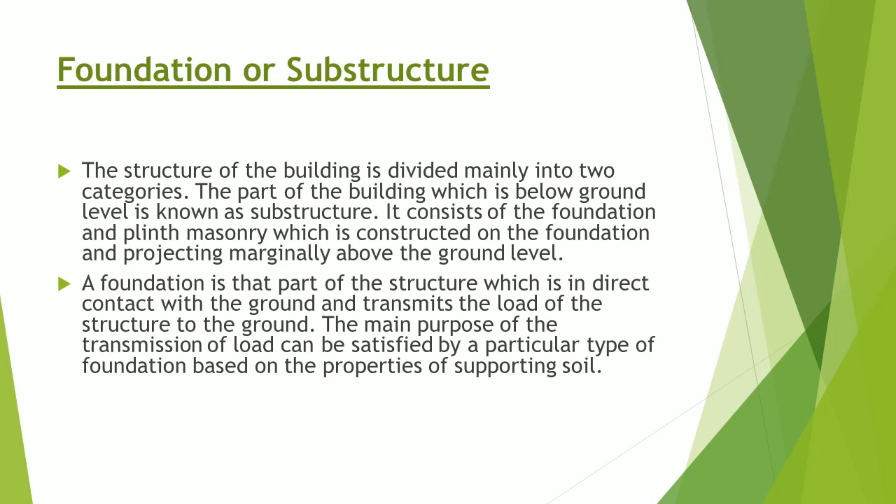The main purpose of the transmission of load can be satisfied by a particular type of foundation based on the properties of supporting soil. Functions of foundation: to transmit and distribute load of superstructure over larger area. To distribute the load on underlying soil evenly and thus to prevent differential settlement. To provide a leveled and hard surface for supporting the superstructure. To increase the stability of the structure as a whole against sliding, overturning, and other disturbing forces like wind, rain, etc. To prevent lateral escape of supporting material.

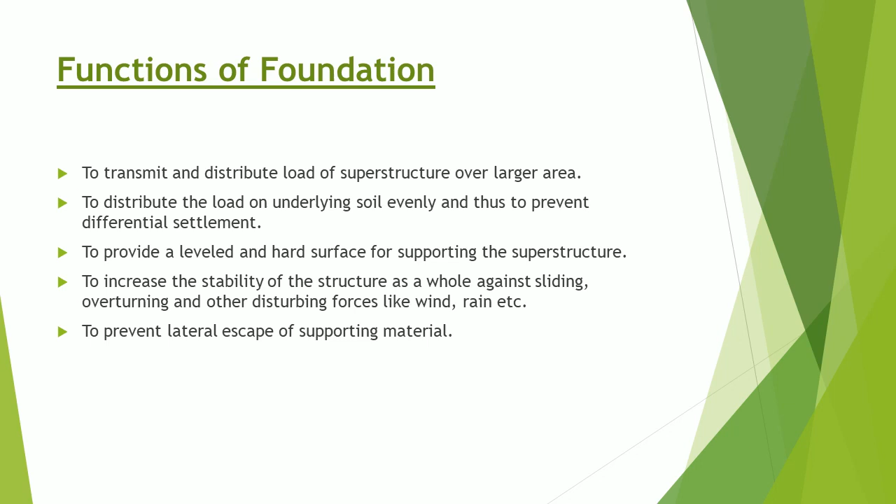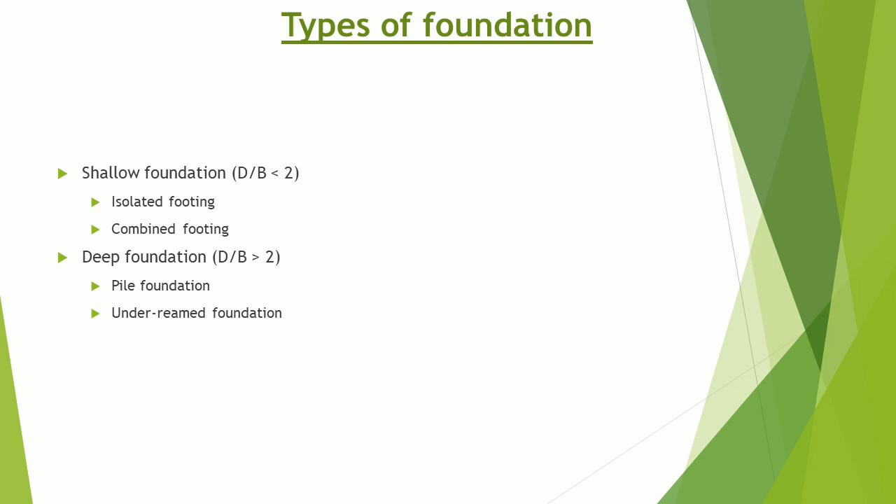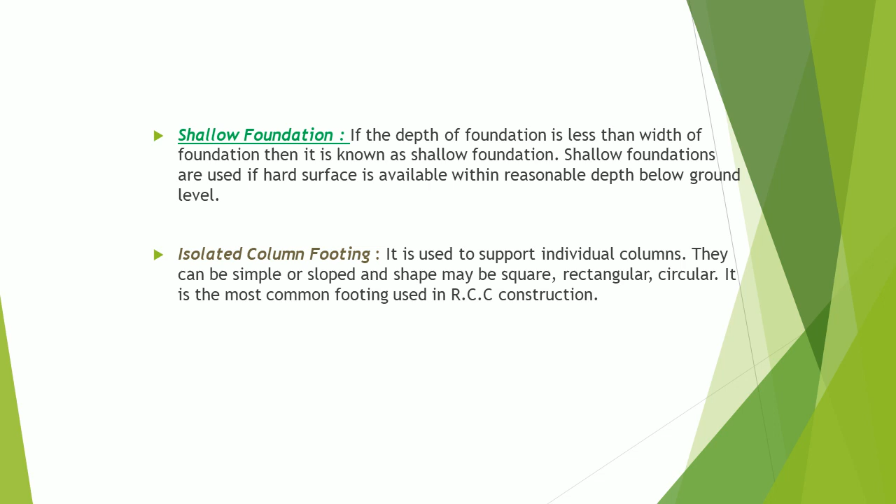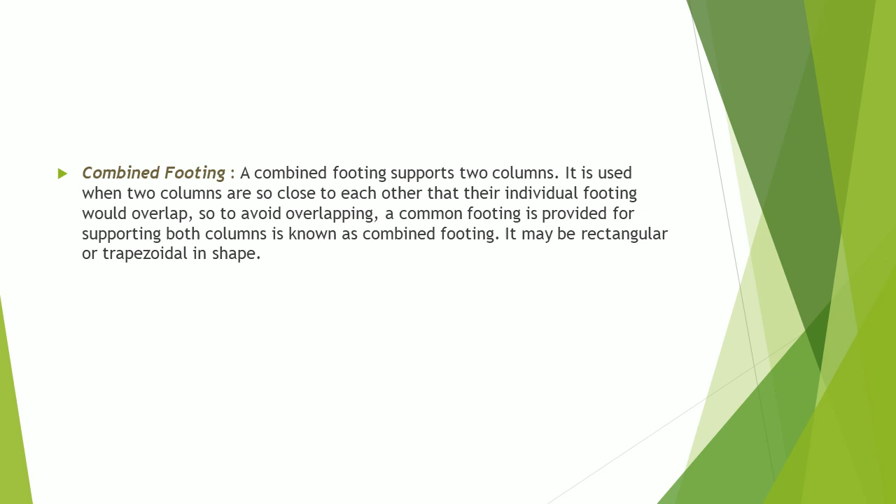Isolated column footing: it is used to support individual columns. They can be simple or sloped and shape may be square, rectangular, circular. It is the most common footing used in R.C.C. construction. Combined footing: a combined footing supports two columns. It is used when two columns are so close to each other that their individual footing would overlap, so to avoid overlapping, a common footing provided for supporting both columns is known as combined footing. It may be rectangular or trapezoidal in shape. Combined footing.

Situation where combined footing is preferred: when the property line is so close to one column that an isolated spread footing would be eccentrically loaded when kept entirely within the property line. By combining it with that of interior column, the load is evenly distributed. Rectangular combined footing is used if sufficient space is available beyond each column and if load on both the columns is same and distance between columns is less. Trapezoidal combined footing is used when load on the columns is different, so more footing area is required for supporting the column carrying heavy load, and also if the distance between columns is large.

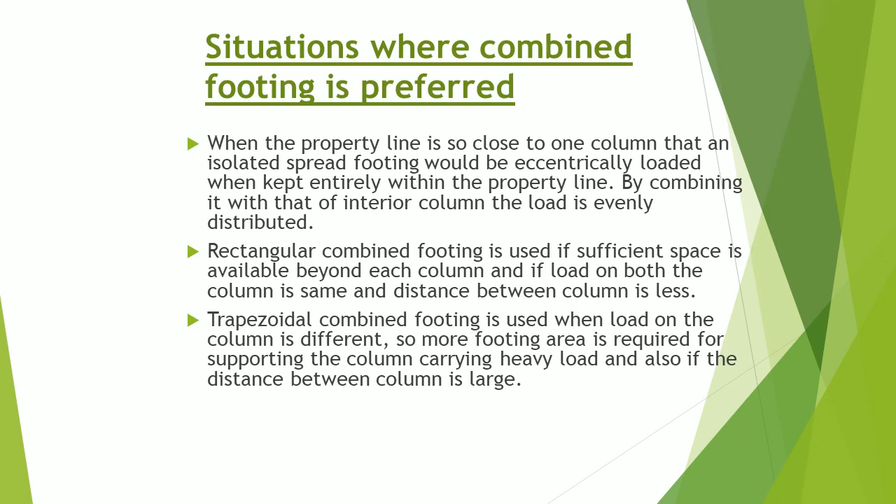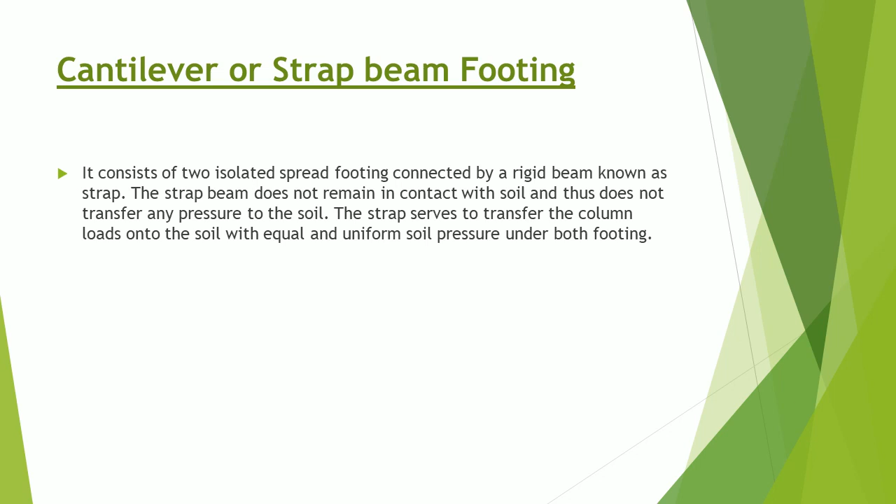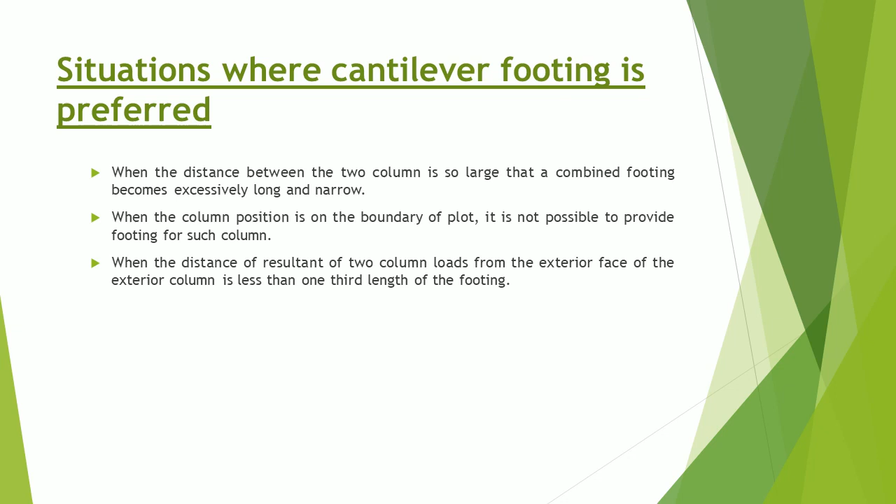Cantilever or strap beam footing. It consists of two isolated spread footings connected by a rigid beam known as strap. The strap beam does not remain in contact with soil and thus does not transfer any pressure to the soil. The strap serves to transfer the column loads onto the soil with equal and uniform soil pressure under both footings. Situations where cantilever footing is preferred: when the distance between the two columns is so large that a combined footing becomes excessively long and narrow. When the column position is on the boundary of plot, it is not possible to provide footing for such column. When the distance of resultant of two column loads from the exterior face of the exterior column is less than 1/3 length of the footing. Cantilever footing.

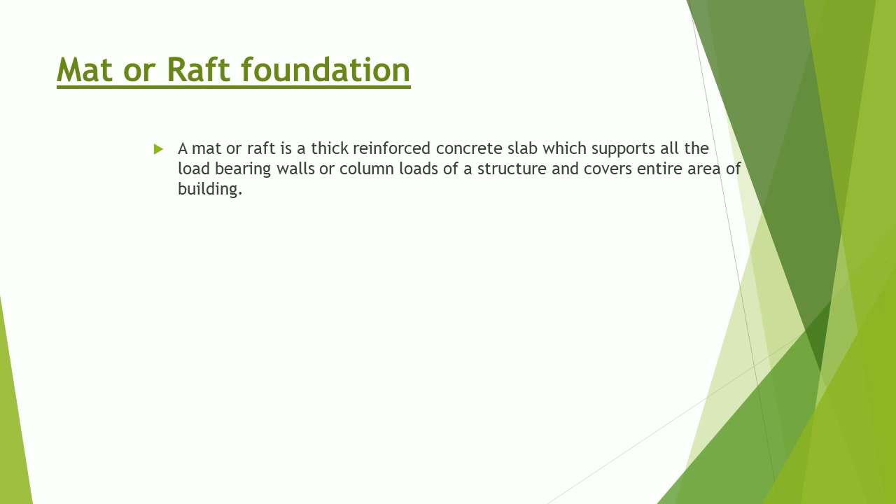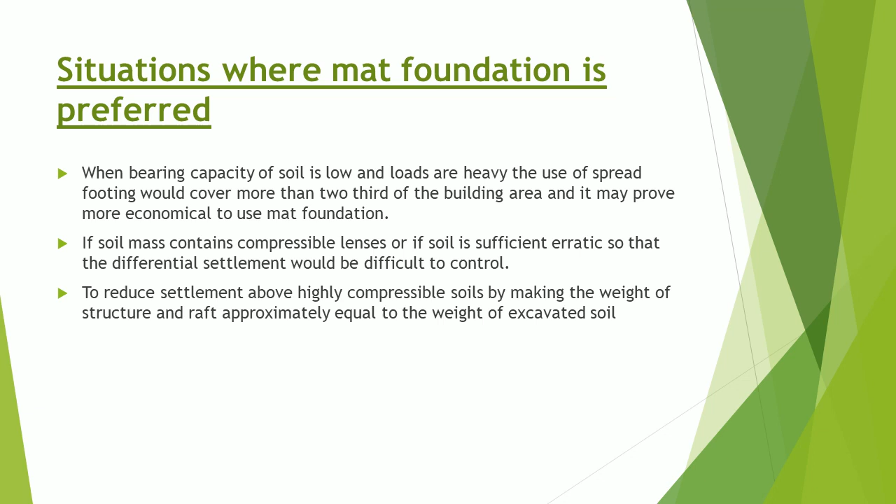Mat or raft foundation. A mat or raft is a thick reinforced concrete slab which supports all the load-bearing walls or column loads of a structure and covers entire area of building. Situations where mat foundation is preferred: when bearing capacity of soil is low and loads are heavy, the use of spread footing would cover more than 2/3 of the building area and it may prove more economical to use mat foundation. If soil mass contains compressible lenses or if soil is sufficiently erratic so that the differential settlement would be difficult to control. To reduce settlement above highly compressible soils by making the weight of structure and raft approximately equal to the weight of excavated soil. Raft or mat foundation.

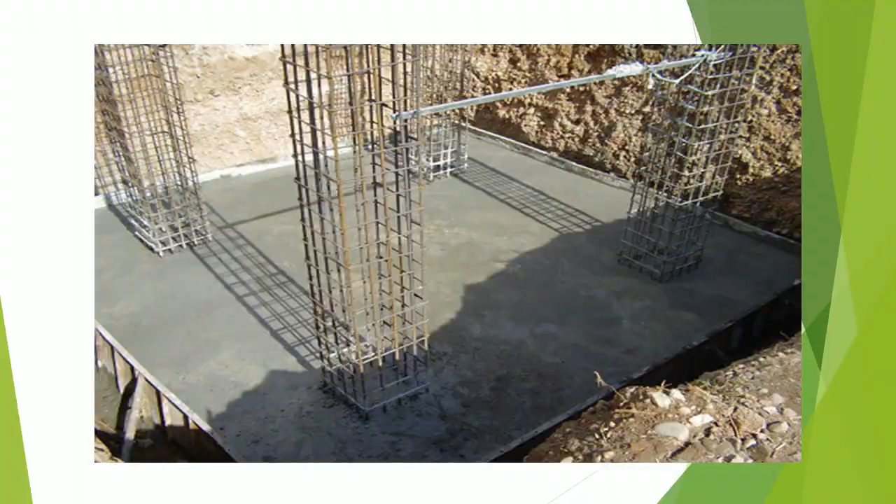Deep foundation. When depth of foundation is greater than width of foundation, then foundation is known as deep foundation. Types of deep foundation. End-bearing pile: these piles transfer load through soft soil to a suitable bearing stratum. Multi-storied buildings are invariably founded on end-bearing piles. End-bearing piles are useful when hard strata is available within reasonable depth in loose soil having low bearing capacity. Friction pile: in places where hard strata is not available at a greater depth, the piles are designed to transfer the load by the phenomenon of skin friction along the length of piles. Such piles are called friction piles. Friction piles are useful in cohesive soils with low bearing capacity.

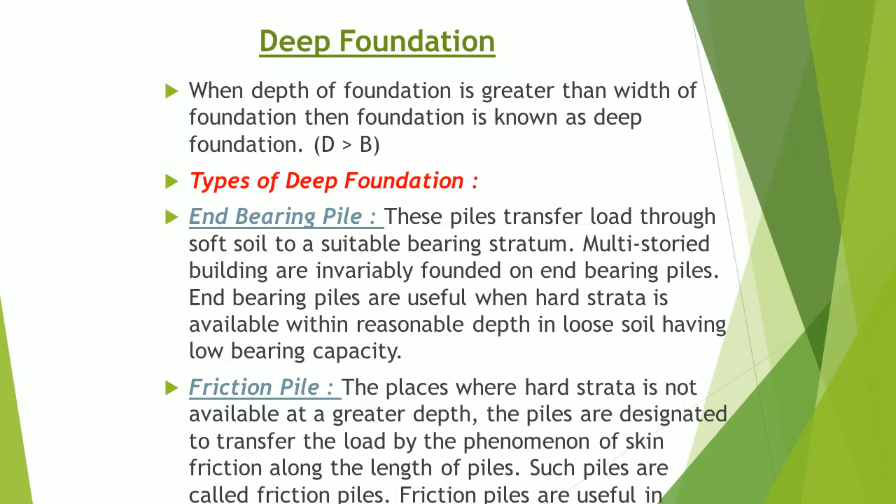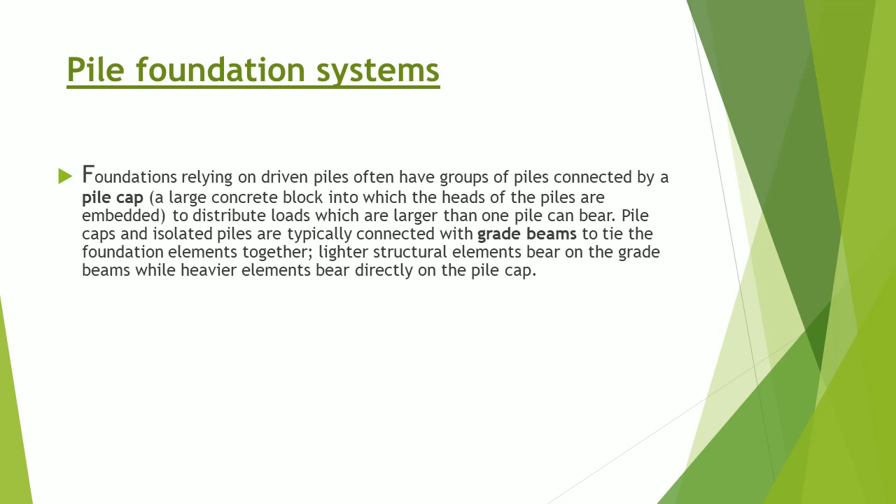Pile foundations. Pile foundation systems. Foundations relying on driven piles often have groups of piles connected by a pile cap, a large concrete block into which the heads of the piles are embedded, to distribute loads which are larger than one pile can bear. Pile caps and isolated piles are typically connected with grade beams to tie the foundation elements together. Lighter structural elements bear on the grade beams while heavier elements bear directly on the pile cap. End-bearing pile. Friction pile.